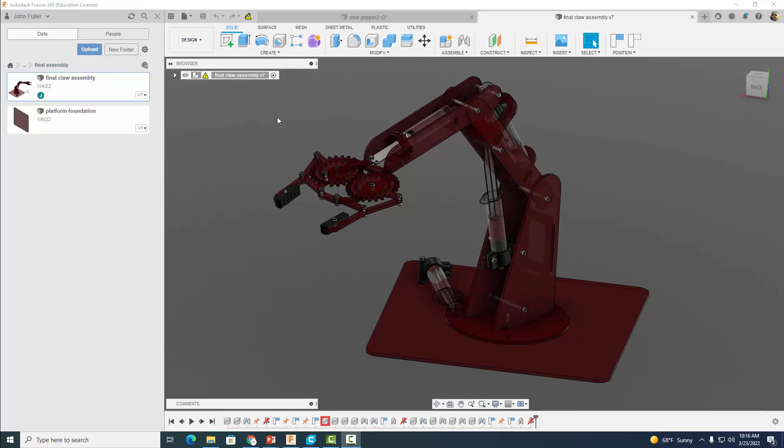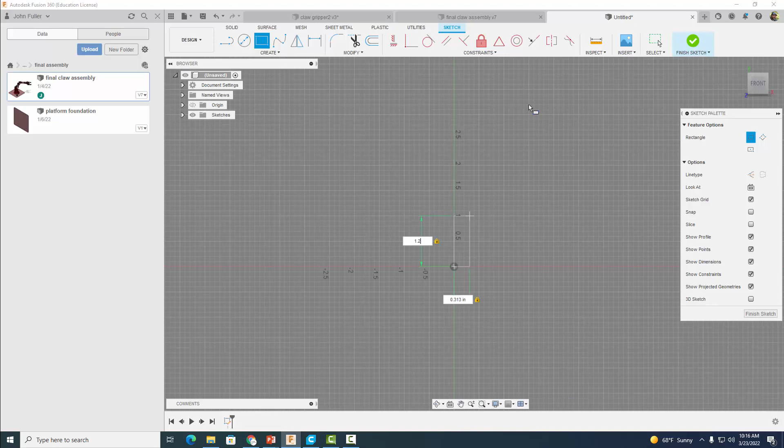Let's come up to File, start a new design, and we're going to start a sketch here on our XY plane. Let's grab our square tool, start it at our origin, and we're going to drag out a square. We're going to make this side 0.313 inches. I'm going to hit the tab button, and this side is going to be 1.25 inches. Okay, I'm going to zoom in here.

We're going to come over to Create, down to Arc, and select our 3-point arc tool, and somewhere in this vicinity I'm going to click here, and click here, and drag out an arc. I don't want to make it tangent for now. I'm just going to make it something like that. And then I'm going to dimension this guy to have a dimension of 0.531 inches. Then I'm going to dimension this distance from here to here. I want that distance to be 0.072.

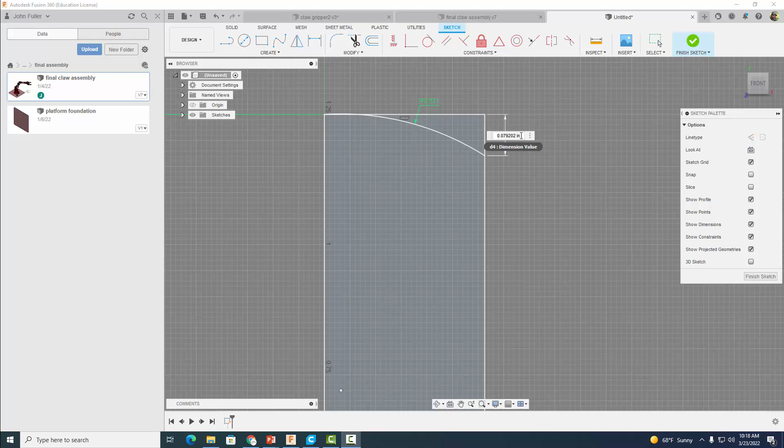Okay, so when we're done, we have something that looks like this. Now we want to go ahead and trim that side and this side. I'm going to zoom in here and trim that guy. So we should have something that looks like this. When we place it on our claw part, our laser cut part, this part will match up with the arc there. Next thing we want to do is create a hole that will allow us to put our M3 bolt through.

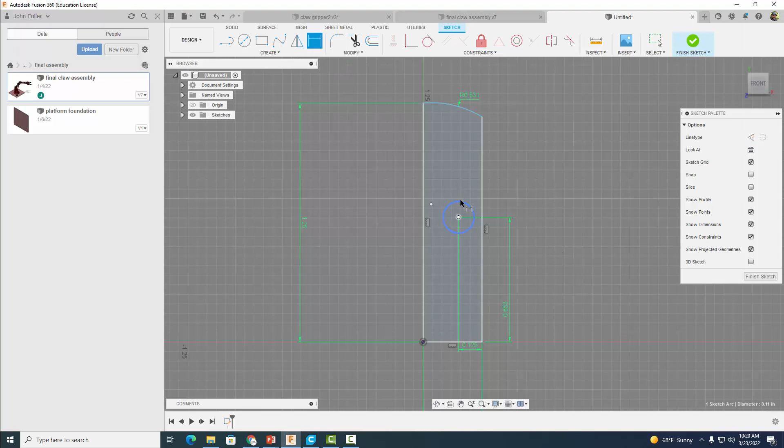So right in here, I'm just going to drag out a circle. For now, I'm going to dimension it from this side. I want it to be 0.125 inches. And then from the center to this side, we want it to be 0.653 inches. Now let's dimension the actual diameter of the circle, and we're going to make that the same diameter as all the circles for our screws, 0.11 inches. Go ahead and select Enter. And that'll do it for this sketch.

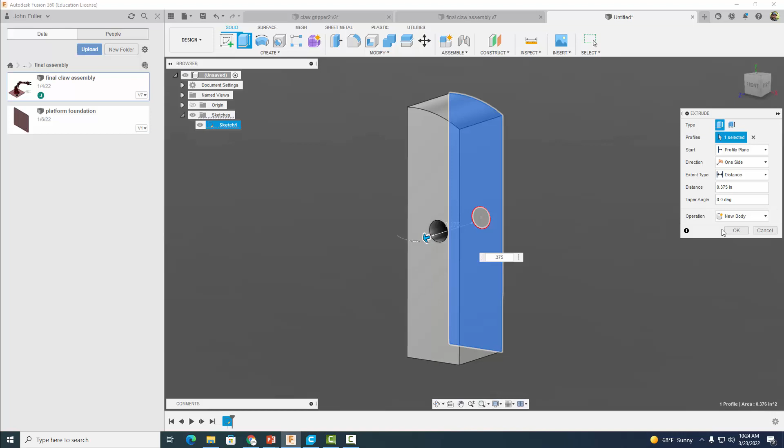Let's go ahead now and extrude this guy a distance of 0.375 inches. Select OK. Then we're going to start a sketch on this face right here and drag out a square. I'm going to find this bottom line here where the X shows up, and just drag out a square, something like that. Dimension this side to this side, 0.125 inches. And then we'll make this distance from here also 0.125 inches.

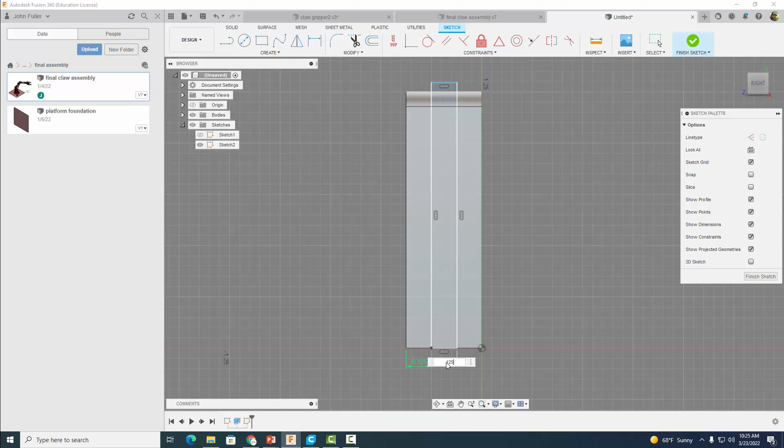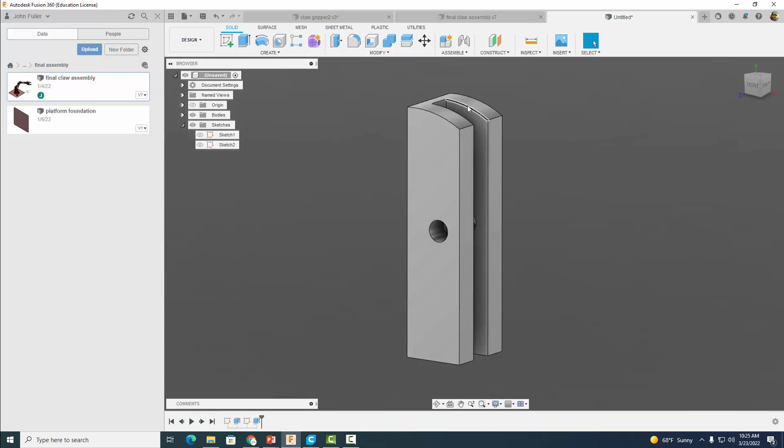Now we're going to finish our sketch, and we're going to extrude this part and this part a distance of minus 0.25 inches. So what this will do is we're going to slide our laser cut piece right in this notch here. And then we're going to put a bolt on it to secure it.

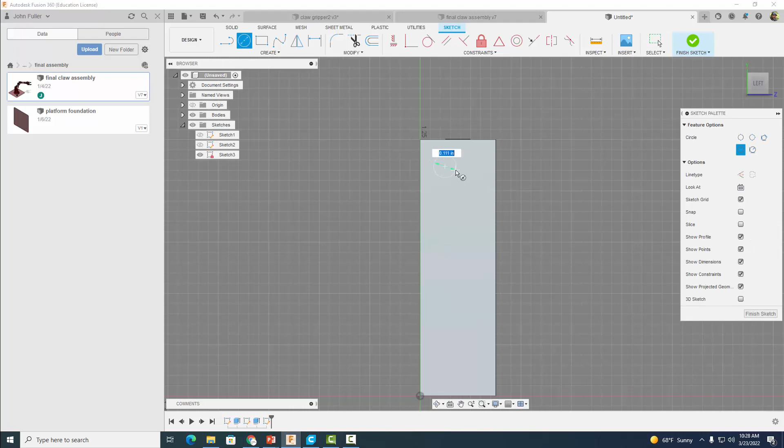Now we're going to create a little feature here on this surface. This is our gripper surface. To make our gripping surface a little more grippier, to help it latch onto objects, we're going to make a little rectangular pattern on here. So right around here, I'm going to drag out a circle with a diameter of 0.125 inches. Then I'm going to center this guy where I want it. We want this distance here to be 0.1, and this distance here to be 0.1 as well.

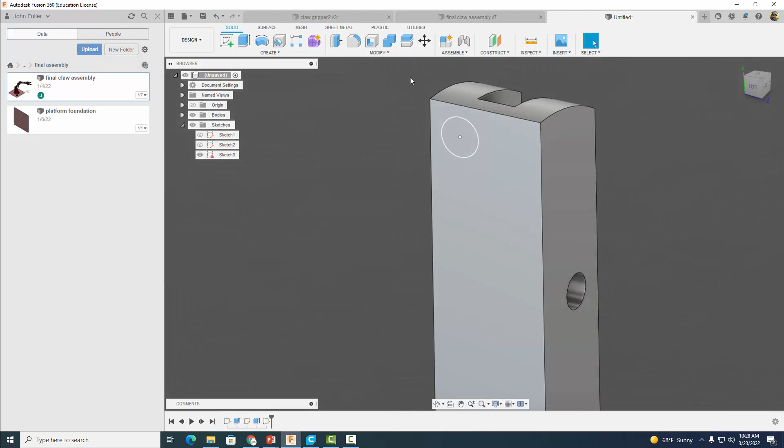I'm going to finish it now. That's it for this sketch. Then we're going to extrude it out a distance of 0.03. Hit OK, and then we're going to come on over here. Just so this 3D prints well, we're going to put a little fillet on here, 0.02, so we don't have any overhang supports. I'm going to select OK.

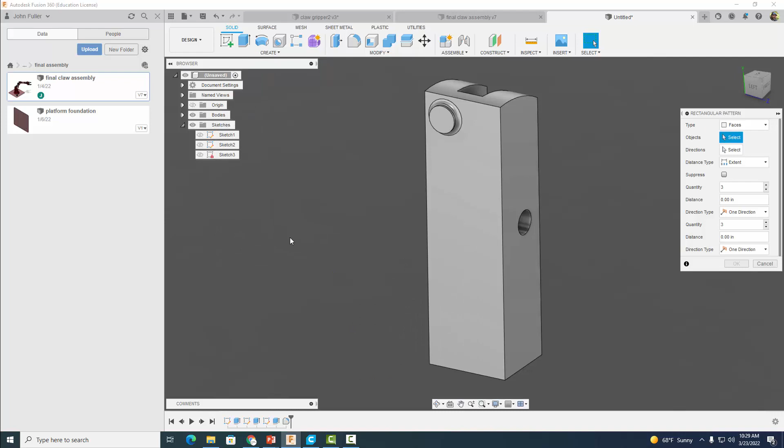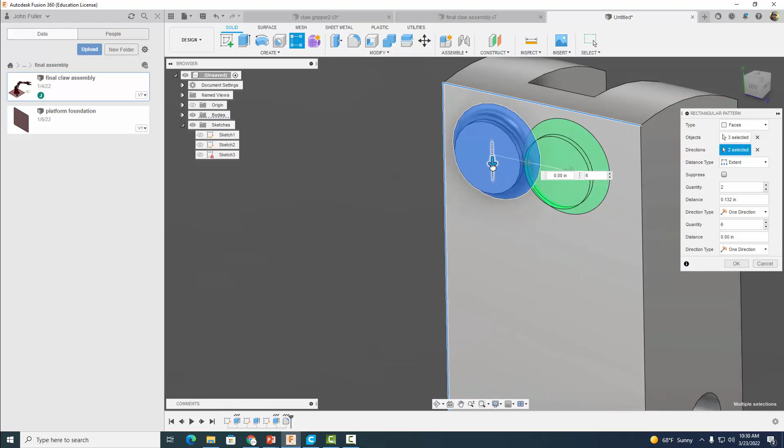Now we're going to do our rectangular pattern. We're going to come to Create, down to Pattern, and we're not going to select circular. We want rectangular pattern. Let's select faces. I'm going to zoom in here, click on that face, and that face. For directions, I'm going to select this direction and that direction. For our quantity, we want 2 of them going this way. And for this direction, we want 6 of them. I'm going to just drag them out for now.

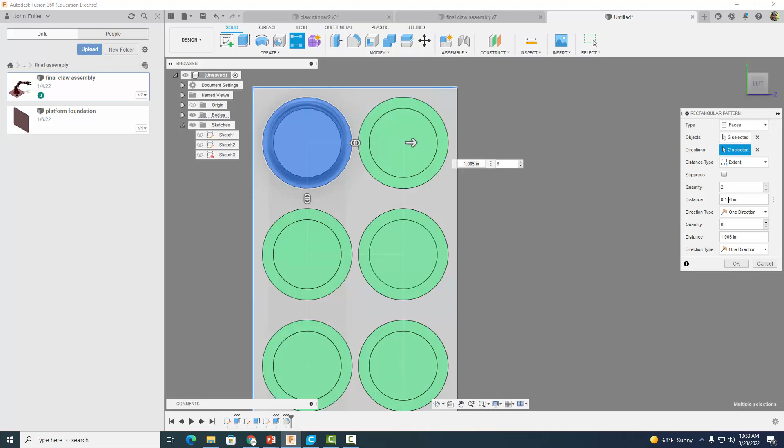For our distance here, I'm just going to eyeball it and see how they look. They look pretty good. I'm going to go back just a little bit, maybe like 0.18. I'm comparing this distance with this distance, and I think we can go back a little more, maybe 0.179. Let's just go with 0.176, see what that does. Let's go with 0.175, something nice and even there.

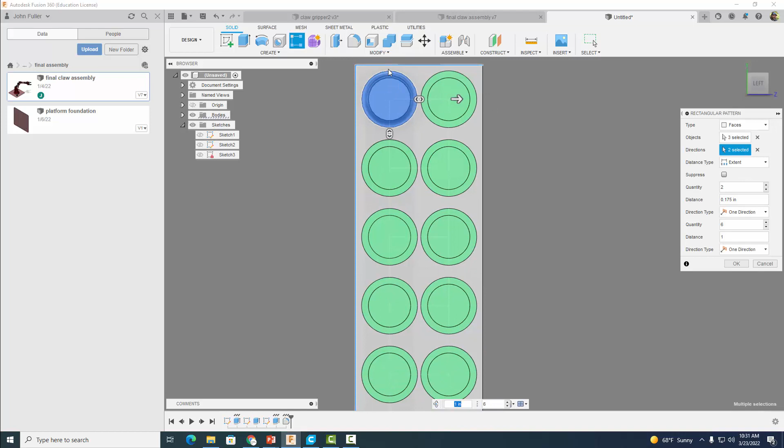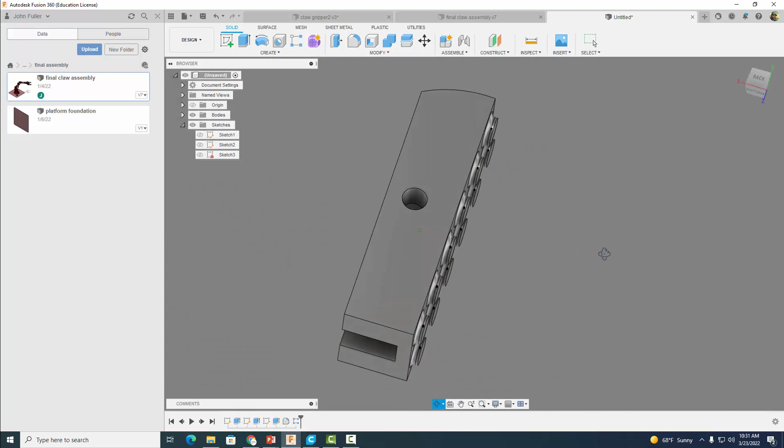For our other direction, we're going to select a distance of 1 inch. I'm going to eyeball it here. I'm going to go further because I have a small gap right here, if you're looking at my mouse, and a larger distance here. So let's just go with 1.408. That looks pretty good. I'm going to select OK. And there we have our cool rectangular pattern gripper thingamajigger. All right, looking good.

The last thing I'm going to do is give it a material. We're going to 3D print these out of TPU, so let's do a rubber material. But first I'm going to give it an appearance, a black color. So I'm going to go to Paint, Glossy, and Black. Hit Close. Then I'm going to go to Modify, Physical Material.

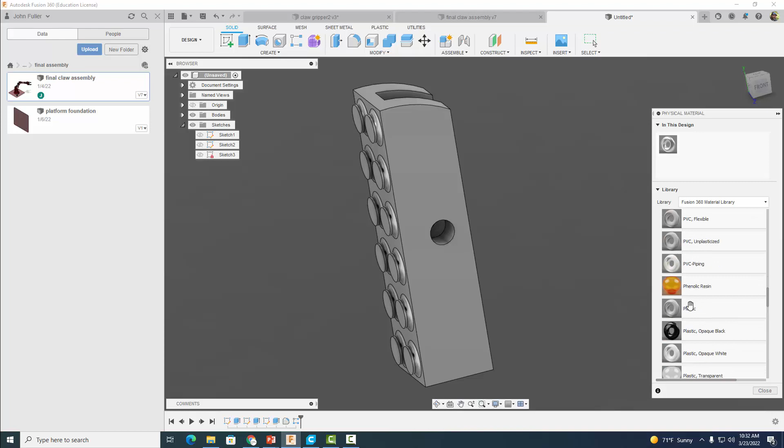I'm going to go to Plastic and search for rubber, see if there's something rubbery or TPU or something of that nature. P rubber black. Here we go. All right, we're good. That'll do it for this part. Don't forget to save it when you're done.